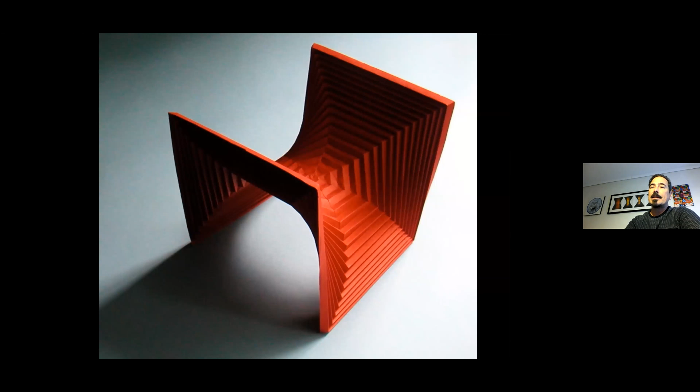Now, today, what I want to do is address one of the amazing questions that was posed by Feynman during his lecture, There's Plenty of Room at the Bottom. In this lecture, way back in 1959, Feynman predicted the miniaturization of information technology, and that's been brought about primarily through Moore's law.

Our computer chips are now packing millions, if not billions, of transistors within them. And in that same lecture, Feynman also talked about the miniaturization of machines. While the electronics portion of that miniaturization has borne great fruit over the intervening years, the mechanics portion, how do you shrink down mechanics in machines, that part still has a way to go. And this is what I want to address in this lecture.

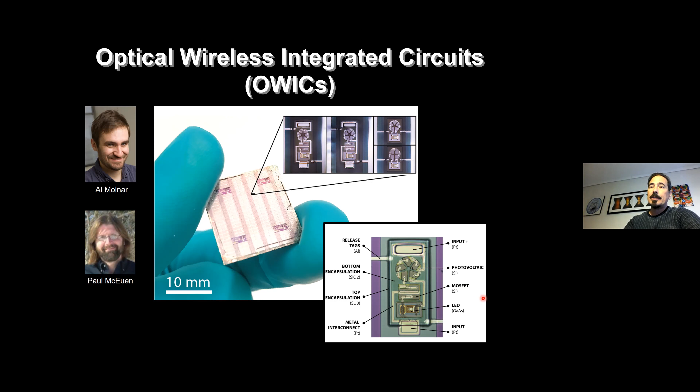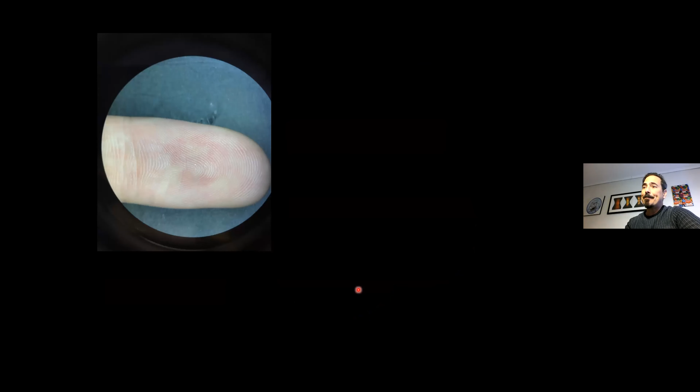And in the very near future, you're going to see these as little tags. So look down at your finger, and if you notice that little speck of dust, that actually someday could be one of these little devices measuring the pH of your skin, or something that can report to a cell phone the conditions that are going on your surface.

So the electronics part, in terms of making machines at the small scale, that's basically a solved problem, especially with this ability to remove the electronics from the wafer.

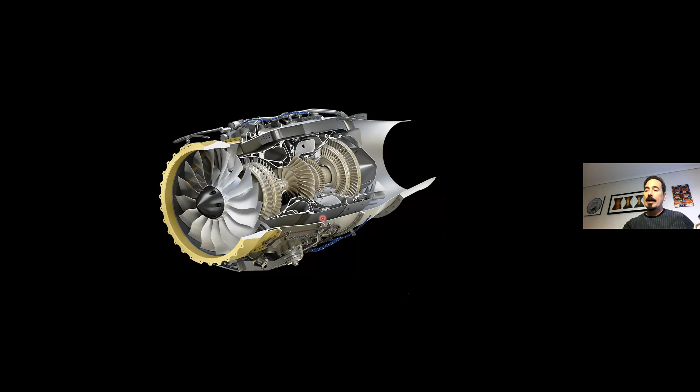So what ends up being the harder piece is the mechanics. So why not just take a 3D machine and shrink it down to the micro scale? What's the problem with that?

Well, it turns out that that's been tried. For example, this is a turbine engine worked on by the Epstein Group at MIT. This was a decadal project, many millions of dollars spent, and it never really worked. The reason it didn't work is that the physics governing the behavior of components really changes as you go from the macro scale to the micro scale. There's a problem in the fabrication part, which is that you can't really shrink a graduate student down to the micro scale with a little screwdriver. So you've got to figure out how to make the machine differently. The physics operating, the electrostatic attraction between surfaces, the fact that fluids become viscous on small length scales, all of that changes as you try to shrink your machines. And that really requires a paradigm shift in the way that we think about them and how to design them and build them at the micro scale.

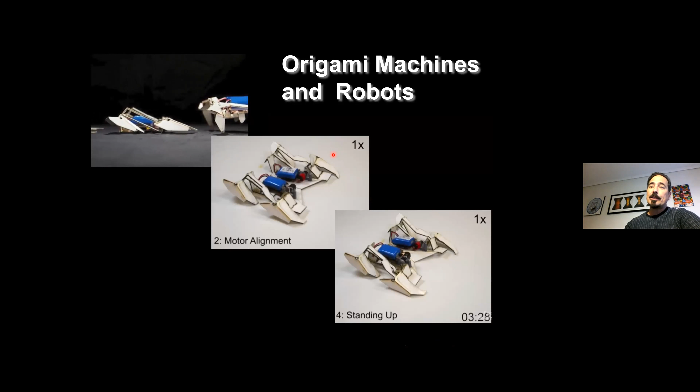So we were quite inspired by this result that came out of Rob Wood and Erik Demaine's labs at Harvard and MIT respectively. In this particular paper, what Rob and Erik showed was that you could take a sheet and essentially print an origami robot. Then you would slap a couple of batteries on, and once it folds its internal legs, it just walks off the page. So the idea here is to print the robots in 2D and now have them fold up into the third dimension, and then they're ready to go.

Now, admittedly, 80% of these robots caught fire as they were crawling off the page. But the idea of somehow printing in 2D is really quite inspirational.

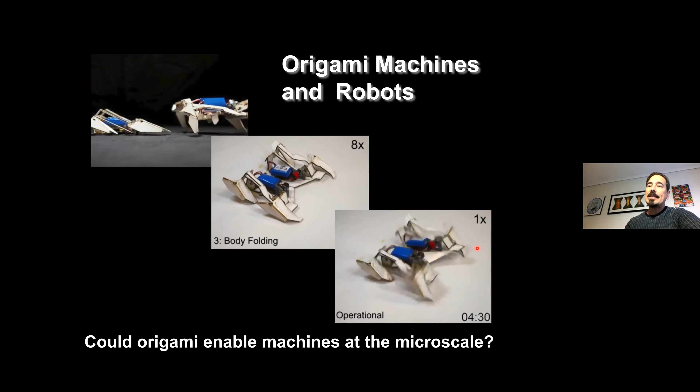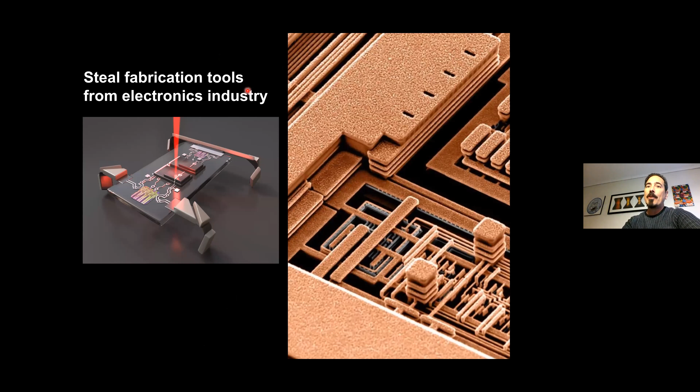And the question now is, could origami enable machines at the microscale? In particular, can we essentially steal all of the technology that's been developed by the semiconductor industry to fabricate computer chips? Could we now steal that technology to essentially fabricate our robots in 2D around these microchips, and then fold everything up and get it to adopt a 3D configuration that would allow it to function as the intended machine? So that is the idea.

And what I'd like to tell you about next is all of the things that went to make it happen.

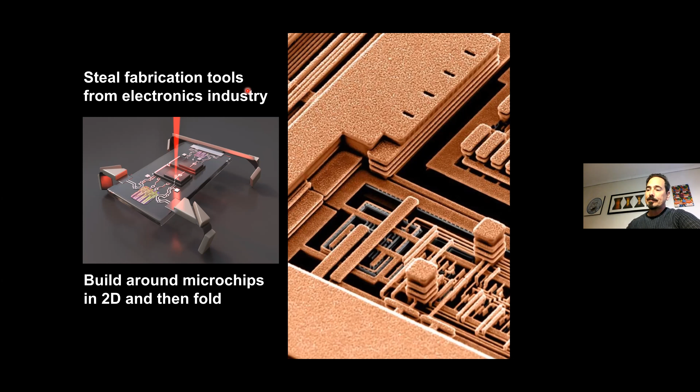So the first thing that I want to talk about is why origami. Origami is particularly attractive because these days we know a lot about the shape and the science of how it works. For example, we can now make almost any arbitrary shape that you want out of a single sheet of paper. In fact, you can take a class at MIT that Erik Demaine teaches on a program called Origamizer. That program essentially codes any three-dimensional shape, in this particular case a model of a bunny, into a fold pattern. It takes a while, so 8 hours by an origami expert, but once you've folded all of this up, you get the intended shape that you were going after.

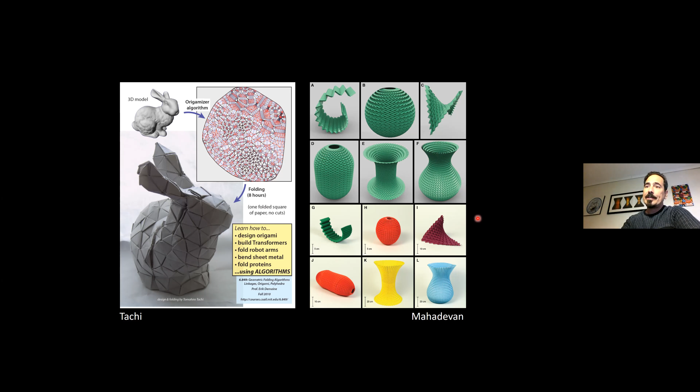Here's another example from the Mahadevan group at Harvard, again illustrating that by changing the fold patterns, you can really generate arbitrary curvatures and surfaces just by tuning or designing your fold pattern properly. So there's a lot that we know and understand about shape, and there's still ongoing research on trying to figure out how to create fold patterns that are universal, meaning that they could adopt more than one shape. We're working on that, but this is kind of giving you a little bit of an idea of the types of things that, the flexibility that origami gives you.

My group was quite invested in trying to figure out something about the mechanics of origami. So the idea now is that origami, in addition to giving you shape, the fold patterns actually endow your paper with new material properties. In essence, it makes your paper into a metamaterial where the stiffness of the material is really controlled by the fold pattern rather than the paper itself.

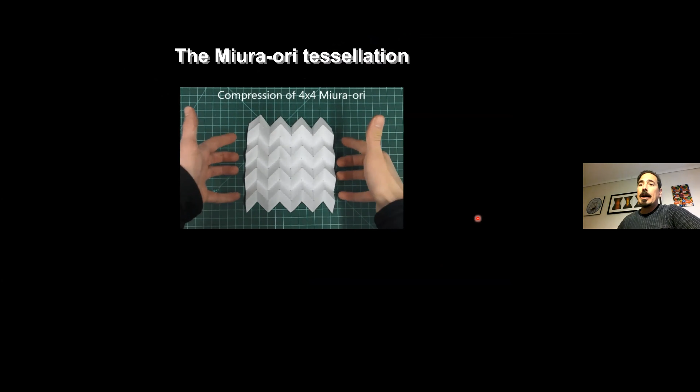Okay, so here's an example of one of these projects. This is called the Miura-ori tessellation. It's interesting because the pattern can fold into a flat shape. So the idea is that if you compress it, it'll fold into a flat state. And the fold pattern really gives you a stiffness to the pattern that's different from what's involved in the paper itself.

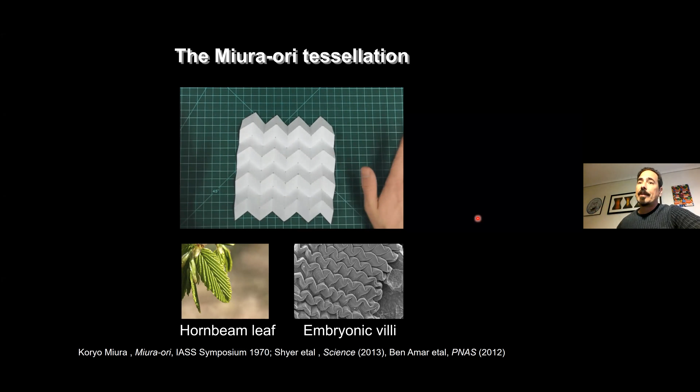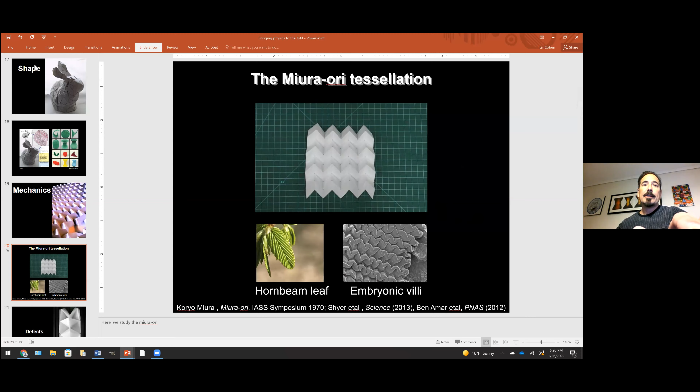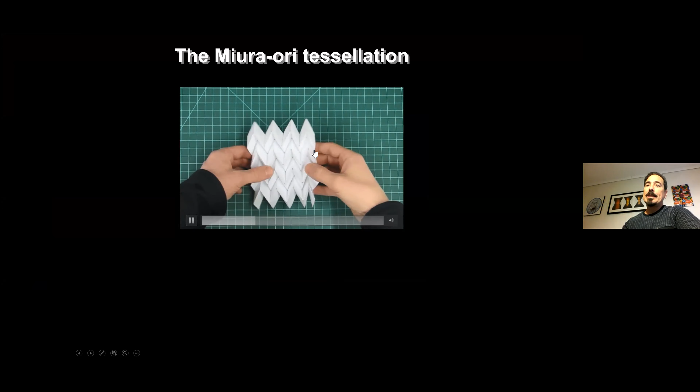So now an example of the mechanics of this would be to try to measure the stiffness of that origami pattern. And that's indeed what we did.

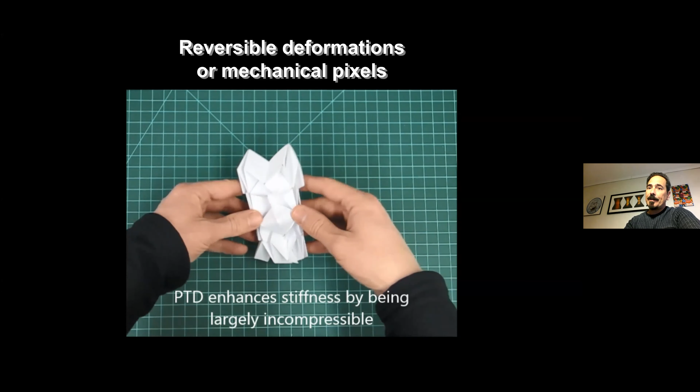We showed that if you introduce defects into the pattern, you can substantially change that stiffness. So in particular, if you take that same sheet and pop one of those valleys into a mountain, there's the pop-through defect we created right at the tip. Now when you compress the sheet, it gets stuck once it gets to the defect and becomes incompressible. Essentially, you've made the sheet stiffer by introducing a reversible deformation, because I can pop that defect back, and the sheet goes back into its original compressible state.

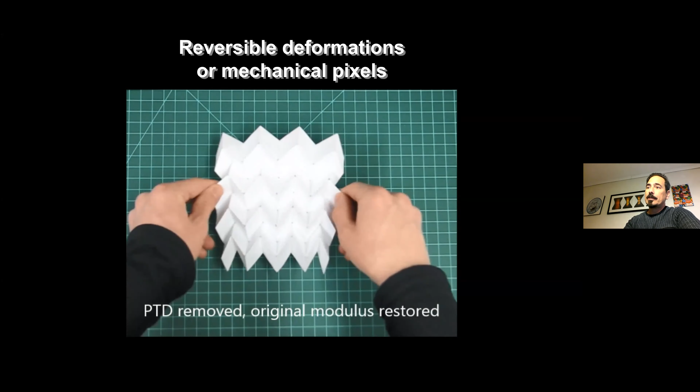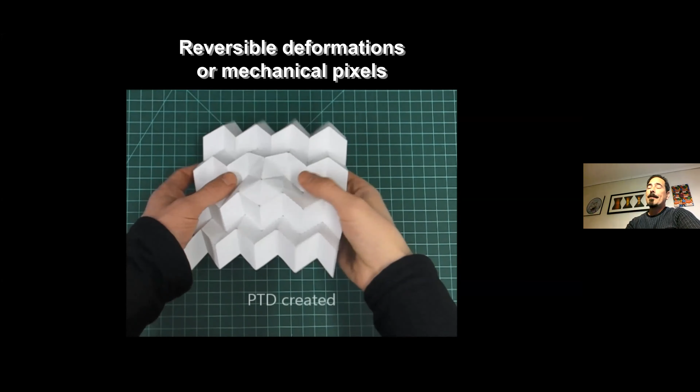What's interesting is that as a function of the density of these defects, you can essentially arbitrarily tune the stiffness of the sheet. And it goes like that until the defect density gets so high that these defects can actually interact with one another. In this particular case, we're putting two defects, one up there and one down here.

What's interesting is that these defects have charge. If you compress the sheet, they annihilate one another, and the sheet compresses as though there were no defect there. Essentially, what you've done is introduce a vacancy where those two vertices annihilate one another.

So again, there's a very beautiful interaction between the charges on these defects, depending on where you place them on the sheet. That's kind of an example of the mechanics we're talking about.

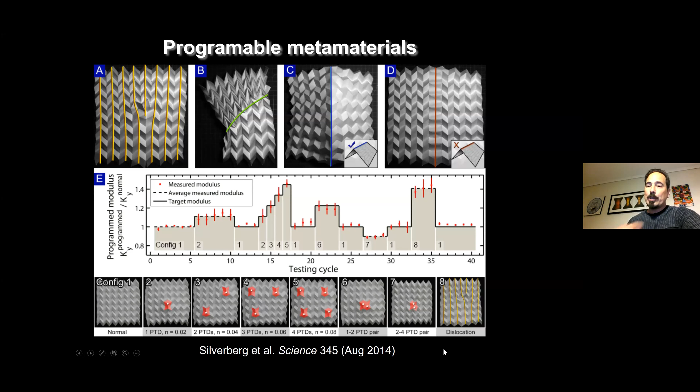At this point, this was our first foray into a brand new world of origami. And as often occurs when you make these giant leaps into the abyss, funny things happen. If you'll indulge me, I'd like to tell you a little side story that took off from this particular science paper. We were very excited to share our results, and we did so at the 6th meeting on origami in science, mathematics, and education.

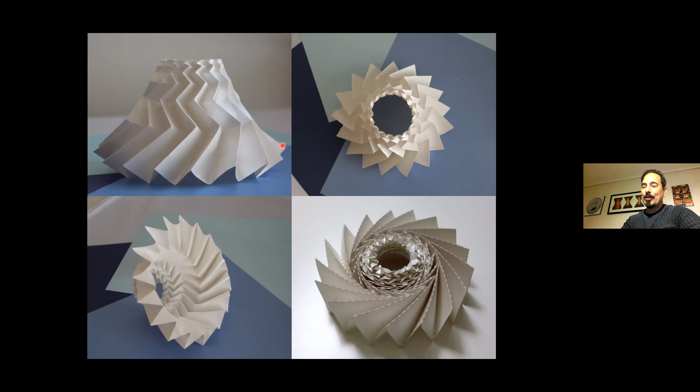In particular, they took this pattern that my postdoc Bin Liu was studying, an interesting metamaterial that allows you to redirect forces away from this donut region, and turned it into a dress, pulling it up into the third dimension. They also took a design for a cylinder that had these pop-through rotations and turned it into a purse.

With these designs, they were invited to present at Vancouver Fashion Week, a major fashion show that happens every year in Vancouver. They ran an Indiegogo campaign and were able to raise enough money to go to Vancouver.

I was boasting about this to my mother, and she said, 'Well, are you going to go?' And I thought to myself, 'Yeah, I've got to go to the fashion show where our origami designs are going to be presented.' So I also went, and it was spectacular.

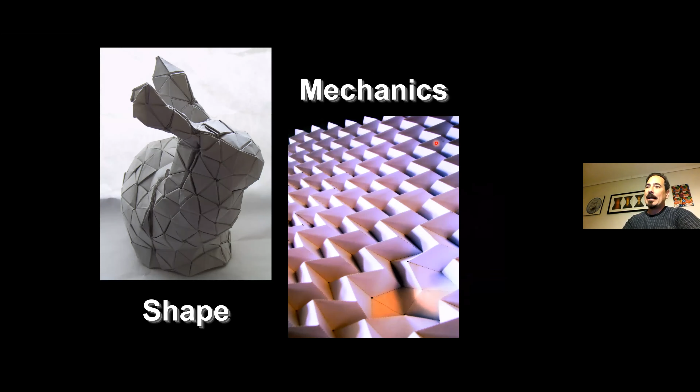Okay, so back to our original game plan. Remember, we're interested in the miniaturization of machines, and we talked about the fact that origami gives you this ability to tune the shape and the mechanics of your materials. And the third property that origami really allows you to control is the scale.

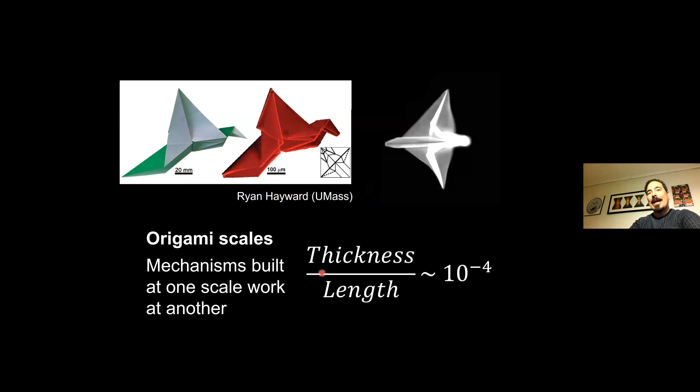The reason is that as long as you keep the thickness-to-length ratios constant in your systems, basically any design that you make at the macro scale, like this randlet bird with a scale bar of 20 millimeters, can be reproduced at the micro scale. Same randlet bird design, but now at the scale of 100 microns. This is work that came out of Ryan Hayward's lab, where he folded these beautiful polymeric origami systems. So that's what allows you to essentially design things and then import that into the micro scale.

So now an origami artist is only as good as their origami paper. And if you want to build micro scale origami, you need micro scale paper. At the time we were thinking about this, my colleagues Paul McEuen, David Muller, and Jiwoong Park were doing these fun kirigami experiments with a single sheet of graphene.

Since then, we've teamed up and worked on designing other kinds of paper. In this particular case, Kyle, Tanner, and my student Baris worked on building paper out of atomic layer deposition. This is essentially a technique where you spray paint a single layer of atoms at a time and bond them to one another to create sheets that are only nanometers thick.

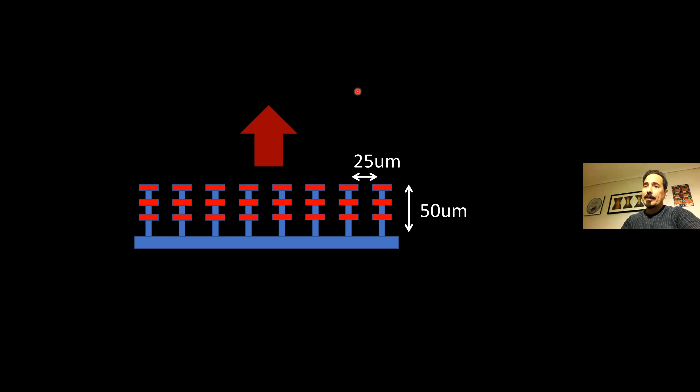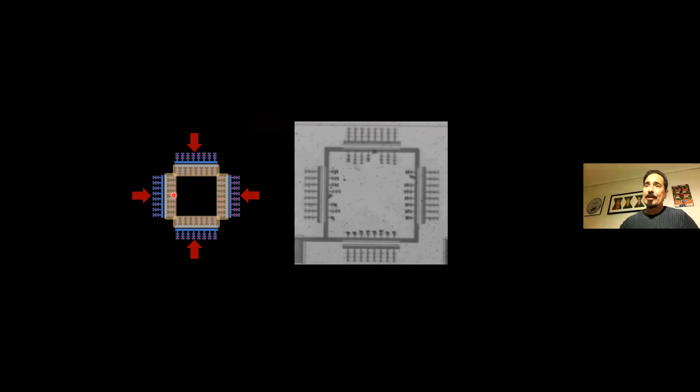Once you have the ability to transport, you can start designing different flow patterns. If each one of these little rows transports fluid in the direction along the orientation of the cilia, by putting these in special configurations you can drive different shapes of flow. If you have all of the internal cilia activated, then all of the flows go into the square, and you essentially create what we call a sink—fluid comes in, and then it comes out in the third dimension.

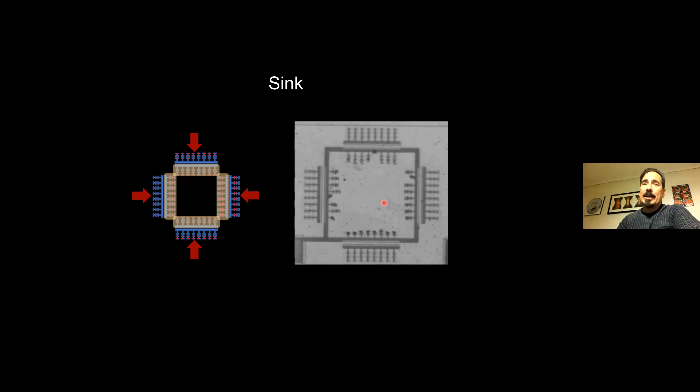If instead you actuate the outer ones, you can create a source. Or if you actuate these two surfaces, you create parallel transport. Or if you actuate these two in and those two out, you create a saddle geometry or a turning flow. Now you can put these elemental flow geometries together to achieve any design that you want.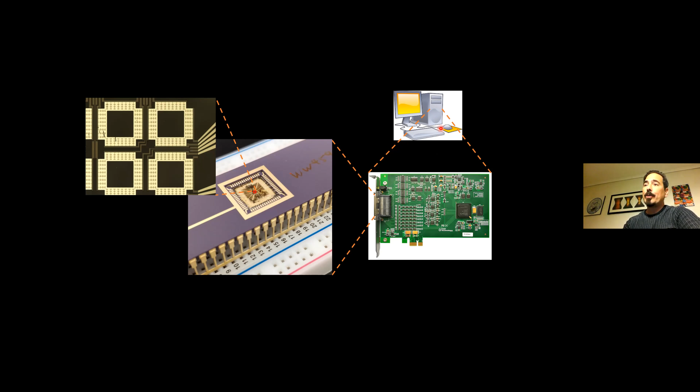With this, you could choose to drive these particular cilia, creating a flow that turns and then drives the fluid in this direction. But on the other side of the device, you could have a completely different flow that drives the fluid up and back down. Both of these can be integrated on the same device and switch between each other.

This is exactly what we did, and we showed that you could essentially tune this array to create any arbitrary flow geometry: transport, circulation, splitting, and merging of these little streamlines, etc. So that's just an example of what we can do with the actuators on their own.

We're also pursuing this as a technology for deployable neural electrodes. The idea is that if you want to look at lateral regions in the brain - how neurons over here correlate with firings of neurons somewhere else - one way is by sticking basically ice picks in the brain in those two locations, but that ends up causing a lot of damage.

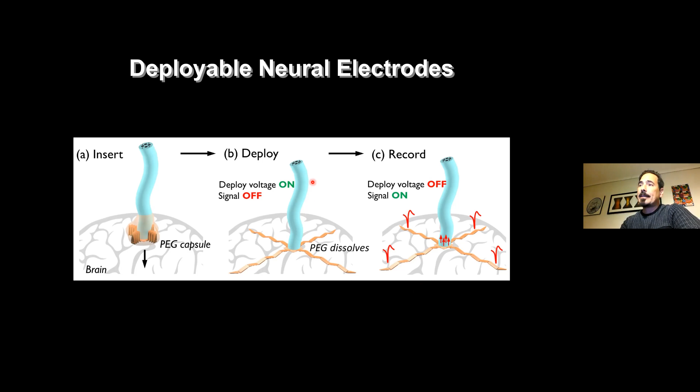To do this, we have to make sure the electrodes can stay put once we unfurl them. We can do that by driving a slightly higher voltage so that the ions that adsorb onto the surface get embedded inside the platinum. Once that happens, there's a barrier for them to get out.

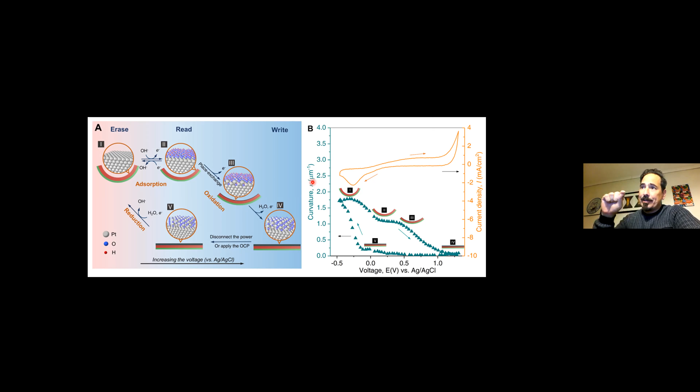What you end up getting is something called a shape memory material, where you can essentially apply a voltage, remove that voltage, but the material remains in the folded state. It stays there until you apply the counter voltage to drive the ions out of the material and get the expanded state. So this ends up being a shape memory material that can hold its shape.

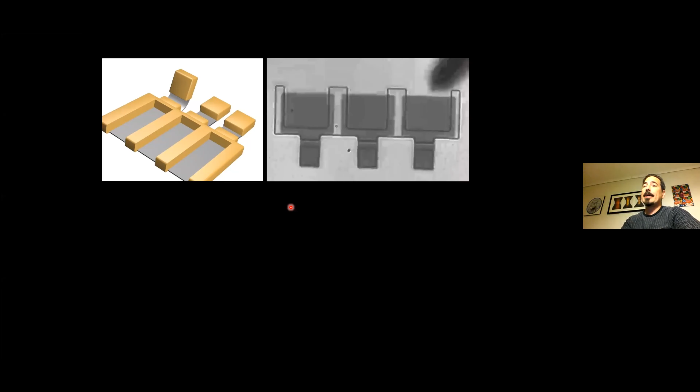Now you can do things like have separate little electrodes that drive different parts of the pattern. You can even have a design where one electrode drives a hinge, and a second electrode through a wire that passively goes through the first hinge ends up driving the second hinge.

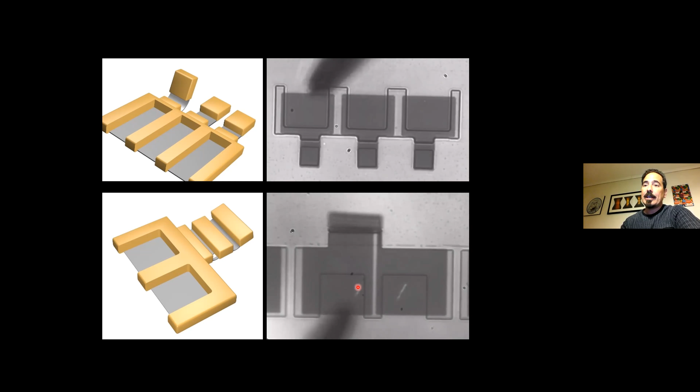That's what's shown in this video, where we initially actuate the first hinge and then keep it folded while we actuate the second hinge that's electrically connected to the first. This is how we want to do the voltage reading - we want a separate channel that goes through all of those activated hinges, only connecting to the tip of the electrode, and sends the current back about what that neuron is doing.

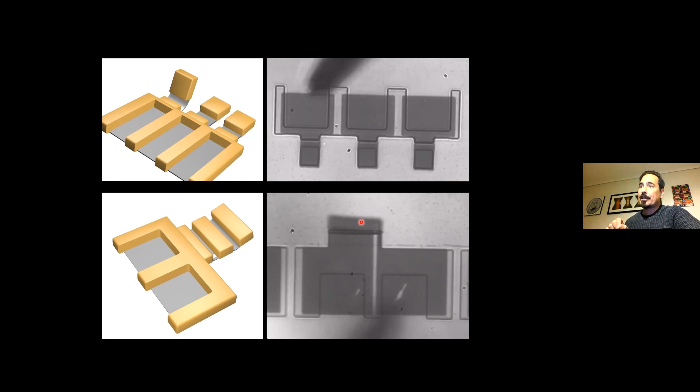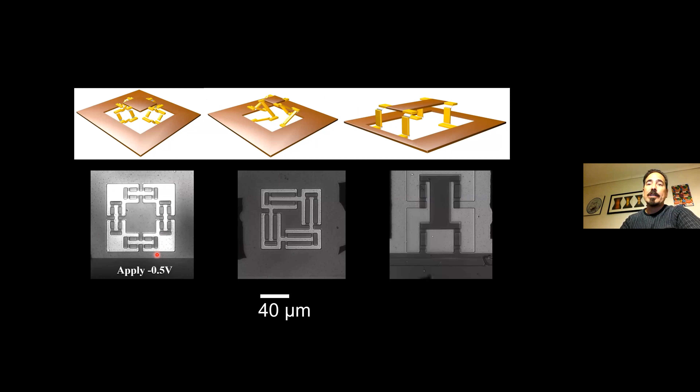We're making origami designs. This is one of the designs that graced the cover of Science Robotics this past March. The idea here, again, is to make designs where if we apply a voltage to them, you can get stages that move in the Z direction or translate laterally, as you're seeing here.

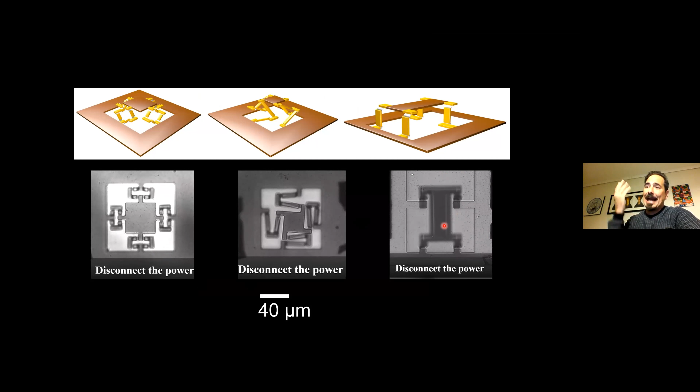They can hold their shape, and then when we apply the counter voltage to get the ions out of the platinum, they can be reset to their original positions. We can make origami patterns like this hexagonal fold, this Miura-ori, or this one, which is the world's smallest duck.

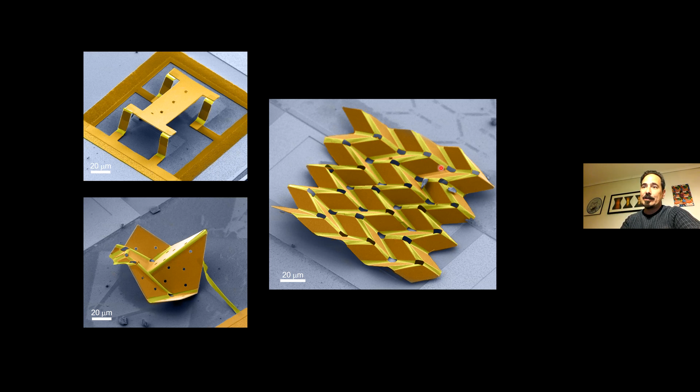All we have to do is shift the voltage on and off in order to fold them, let them hold, or unfurl them. That's the patterns you achieve when you look at them under the SEM, as Qin Kun did. What's amazing is that this type of complexity is achievable in a footprint that's only a couple of hair diameters big. It's really an amazing feat of engineering that Qin Kun, Wei, and others have achieved in the group.

We're also transferring this ability to air. The group of Nick Abbott and his postdoc Nanchi have been able to show that you can use the platinum to catalyze reactions in gases and create stresses that allow you to fold these structures in air as well. So that's coming online too.

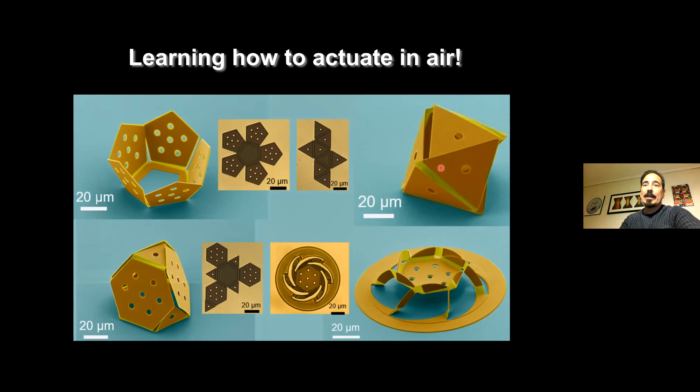With Nick Abbott, Hadas Kress-Gazit, and Alyssa Apsel, we're building metamaterials.

So now we're thinking about these kinds of kirigami tessellated patterns that might allow us to make robotic sheets that can crawl up some chemical gradient and wrap it and fold around it.

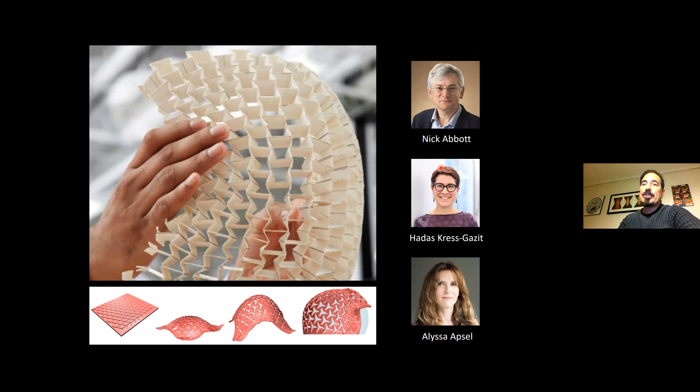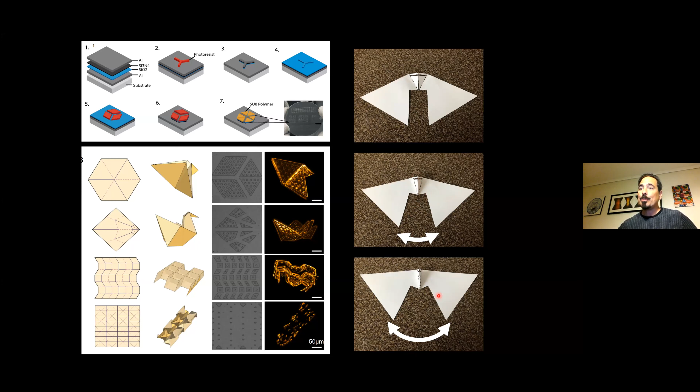We've already shown that we can create hinges that allow you to create splay between two panels. This is a fairly complicated fabrication procedure that allows us to make a mountain fold and two valley folds that, if you actuate, can essentially hide material into the third dimension and cause the splay of these two panels. This is a confocal micrograph of one of these hinges in action, essentially splaying two of these hexagonal pleats.

This is now 6 of them all working in concert. You can see that as you go from the closed to the open structure, the area occupied by the structure changes. And that allows you to create Gaussian curvature.

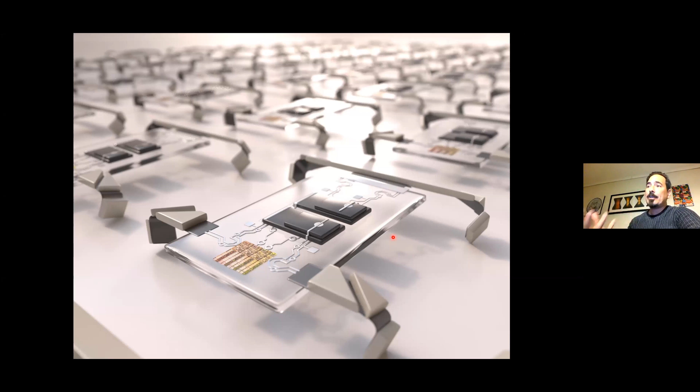Finally, we're working on integrating electronics into these sheets to try to get the actuation to happen without external wires. Let me show you what we've been able to accomplish here.

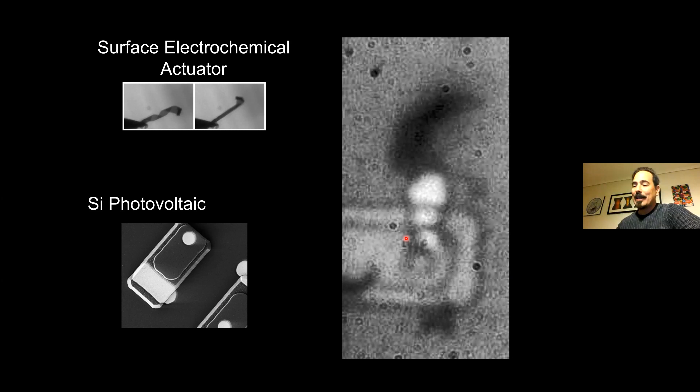And of course, what we're interested in is moving from just this very sort of wave from the Queen into, you know, like something that you'd see at a rock concert. So this is what we're sort of working towards.

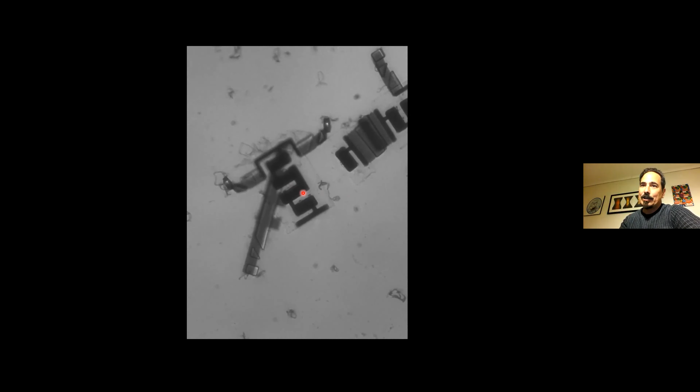And these devices are very robust. You can pound on them with your electrode and they still work no problem. You can shine light from the back or the front and they work just the same.

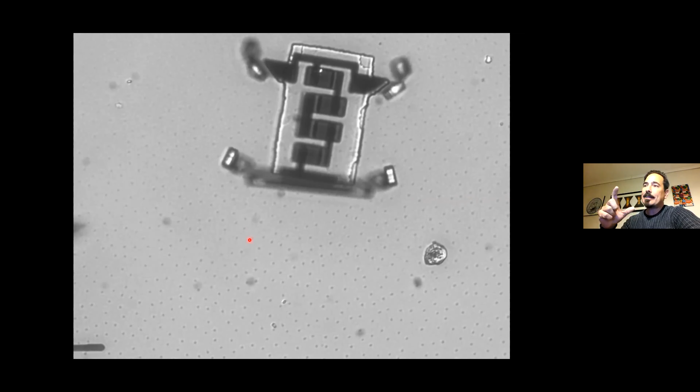And if you work really hard to get the fabrication procedure just right, you can make this device. This is a 40 micron by 70 micron by 2 micron robot. You shine light on the front and then back photovoltaic to activate the front or the back legs. By alternating where you shine the light, this robot folds itself up and walks off the Petri dish, a microscale analog to that macro scale robot that was developed in that Harvard and MIT group.

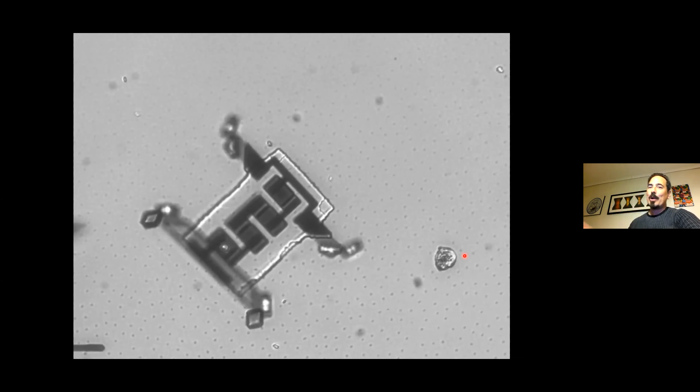This robot is so small that these little bits of dirt here that you're seeing are performing Brownian motion. That's the point where the fluid forces, the molecules that are bouncing up against them, happen to bounce asymmetrically, kicking the particle into this random kind of Brownian motion, a random walk. So this robot is right on the boundary of where that kind of behavior will occur.

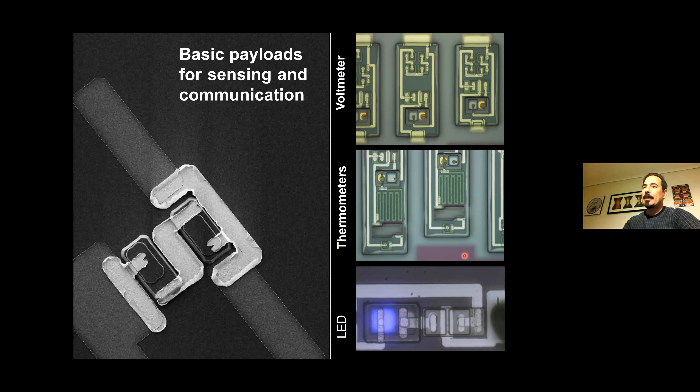Immediately, you can see the potential for these robots. You could already put these basic payloads that Paul and Al have developed for voltmeters and thermometers and LEDs for communicating the state of the system onto these devices. In fact, if you had a 50 nanometer line width, you could essentially create an entire Intel 4004 chip onto this 10 micron by 10 micron footprint of these robots.

That gives you a clock rate of about a gigabit per second. For comparison, Voyager 1, which just left our solar system, has an 8 kilobit per second clock rate. So it's an amazing amount of computational power that we're going to be able to put onto these devices.

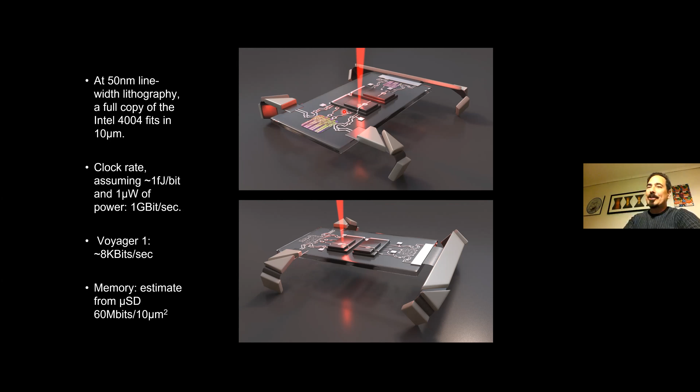You're going to be able to put 60 megabits of memory on these devices for them to store information about what environments they've encountered. There's a group of us at Cornell interested in things like little devices we can implant in brains, microscopic robots we can get to actuate, metamaterial robots, these robots which are based on bubbles that are driving them, and these little sensors.

All of us are essentially working towards trying to integrate these types of electronics, and we're working with a company called XFab, a commercial foundry, to do that. Let me show you one example to finish off. This is a chip that we designed and then fabricated with this commercial foundry, and the goal of this chip was to essentially be a clock circuit.

What we could do with this clock circuit is drive locomotory gaits in a robot. Now, instead of shining the laser on the front and back legs like a marionette where we're pulling the strings, this is the point where we cut those strings. All we do is power the device with photovoltaics and sunlight, and it walks on its own.

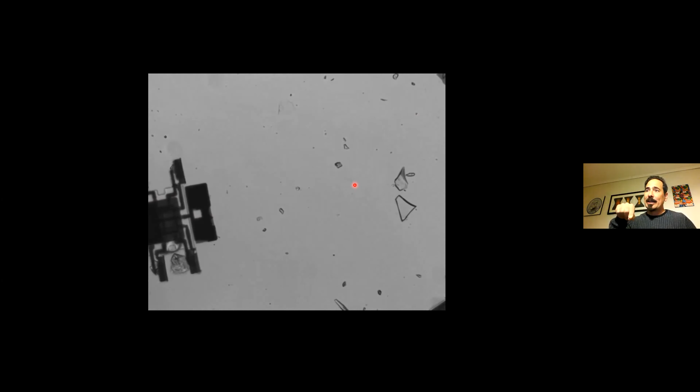And so this is AntBot. It has one of these chips that controls the legged locomotion. All we do is put AntBot under ambient light in the lab, and it walks on its own with this typical hexapod gait that you would see in an ant, for example, where you have two legs on one side and one leg on the other that are on the ground at any one time.

And then the other legs are moving to a new location. Then it switches between those two tripods to get the locomotion to happen.

So this technology is here. We can now design ever more sophisticated brains to put on these actuators, really achieving the miniaturization of machines at these scales. We can suck these up using a syringe and inject them into various microenvironments, including one you see here, where a paramecium is going by our robot.

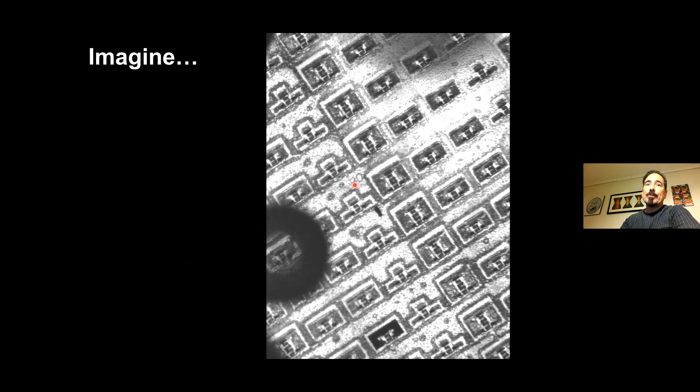You can release 10 million of these on a single wafer, each costing about a penny, able to lift 10 times their weight, and with the potential computational power greater than the spaceship Voyager. It really is an amazing technology platform that's coming our way.

So what are we going to do? What could this technology enable at the 100 micron scale? Well, basically, all you have to do is think about what robots do for us at the macro scale, and now translate it to the micro scale.

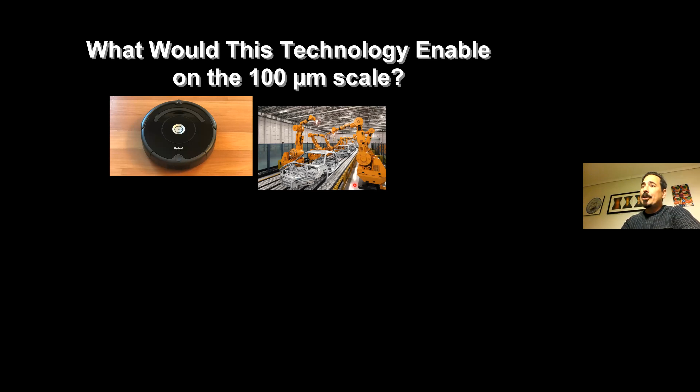So we use robots to clean our floors. At the micro scale, these robots could be used to clean biological surfaces of, let's say, synthetic tissues that we're building. They can be used to assemble microscopic components. They could be used to transport cargo from one location to another, or organize their spaces.

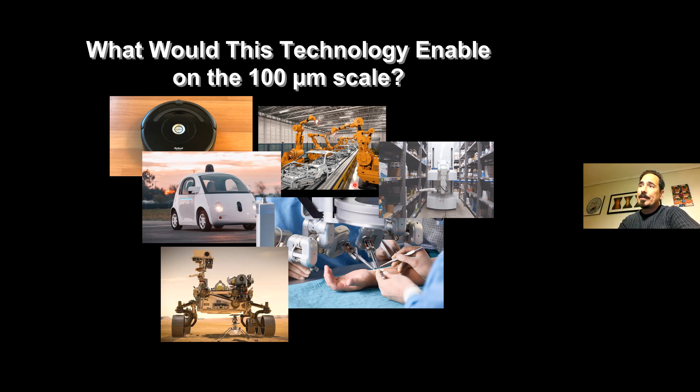They could be used as surgical instruments that can allow us to get to length scales 10 times, or more, smaller than what can currently be done with surgical robots. And they can be used to explore environments that cannot be reached by optical microscopy, maybe cavities inside surfaces that we can't explore just by looking at them.